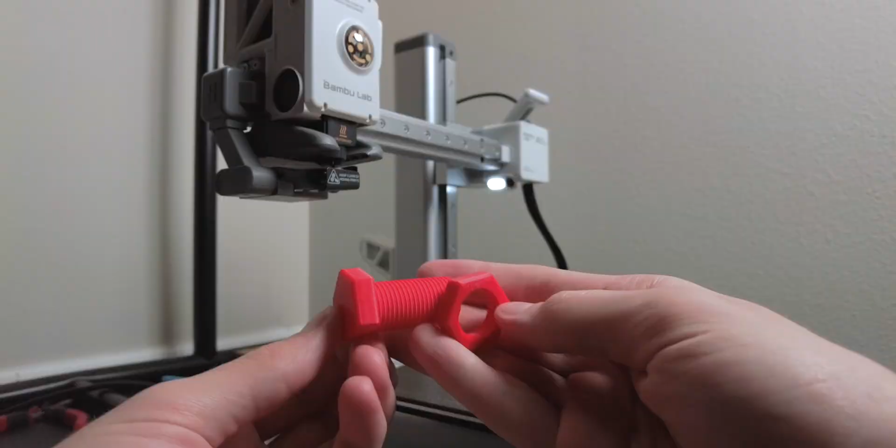Usually, threads are 3D printed vertically because it's an easy orientation to print, and while this may be okay in some cases, it doesn't give us the best strength because the layer adhesion strength becomes the bottleneck. It's very easy to pull the layers apart in comparison to stretching the layers apart. Igor from My Tech Fun made an entire video about 3D printing threads for the maximum strength, and this video is going to demonstrate how to design a bolt with this in mind.

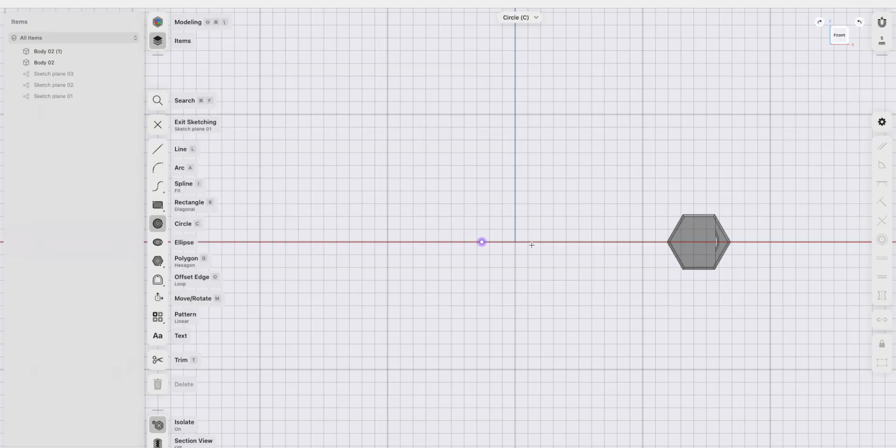I'll demonstrate this in Shapr3D. The first thing that I do is create a circle sketch with the center of the circle being on axis. I give the end of the bolt a slight bevel, then I jump to the perpendicular plane to design the thread portion. I sketch out a square shape to create a 45-degree thread angle. Then I rotate the sketch by 45 degrees and arrange the square so that the diagonal cross section is beyond the boundary of the cylinder that I've created.

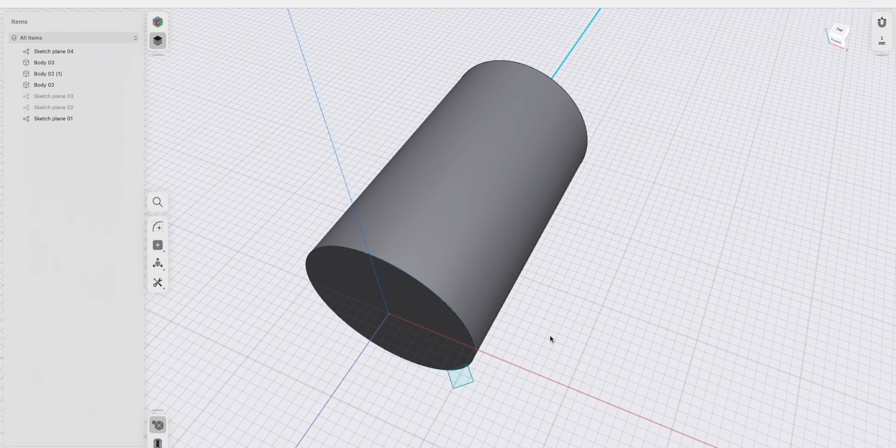I then move this square sketch down so that way the soon-to-be threads will cover the entire length of the cylinder. Then I select the square sketch and the axis the cylinder is centered on. I select the revolve tool, which creates a thread-like shape that I can extend beyond the length of the cylinder. Then I can adjust the pitch, which is usually a higher number, and normally I start with 9,000. Then I select the cylinder and the threads and use the subtract tool to create the threaded bolt shape.

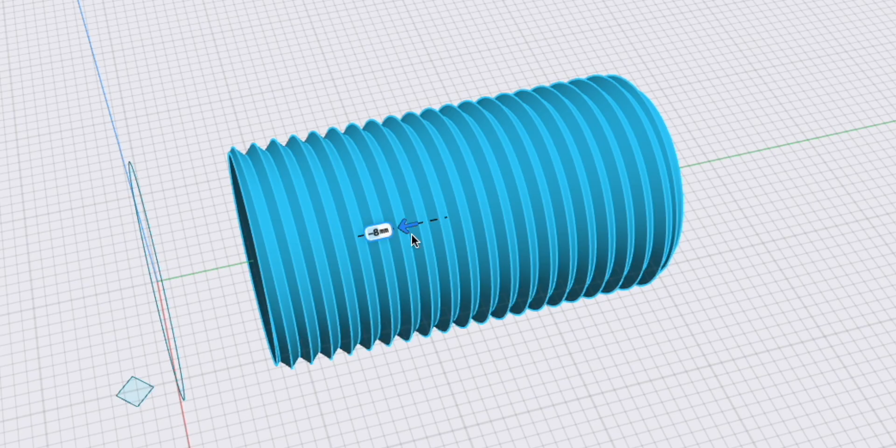I can then give this bolt a little shimmy to the left and create the hex head portion. The circle sketch is still chilling where I left it, so I can use the polygon tool to create a hex head shape and overlap the circle sketch. I then select the circle and hex shape and extrude it to create the hex head portion of the bolt, and I change the defined parameter from subtract to union. For added touch, I'll give the head of the bolt a little bevel.

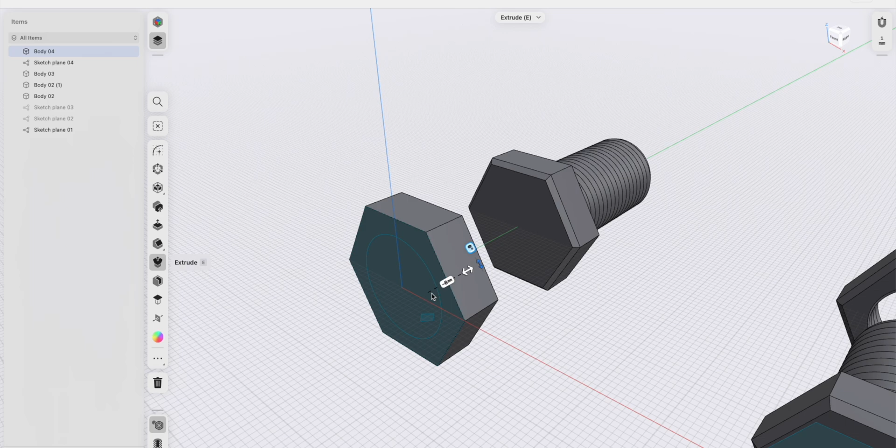I then move this bolt directly down the same axis so I can create the nut. I then move the nut down axis and create a duplicate of the bolt. For added touch, I'll give the head of the nut a little bevel. Next, I'll select the second bolt, and using the scale tool, I'll increase the height and width by 6%. Now keep in mind, how much 6% actually is depends on the size of the bolt that I'm working with, so as long as I do my math to figure out my tolerances, I should be good.

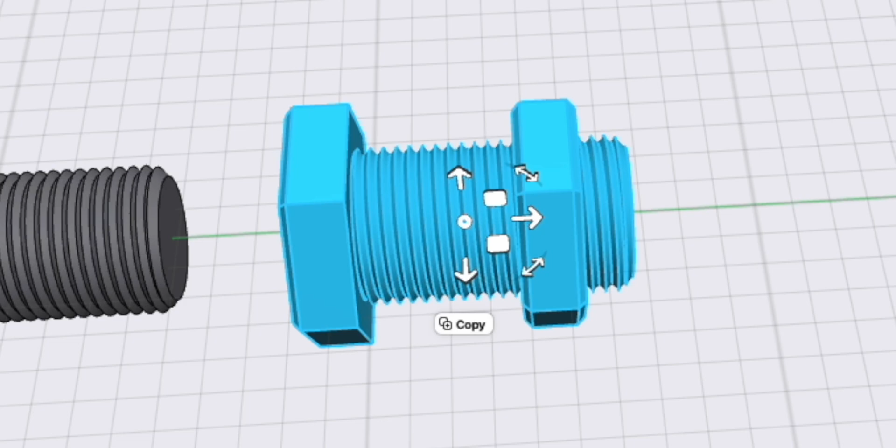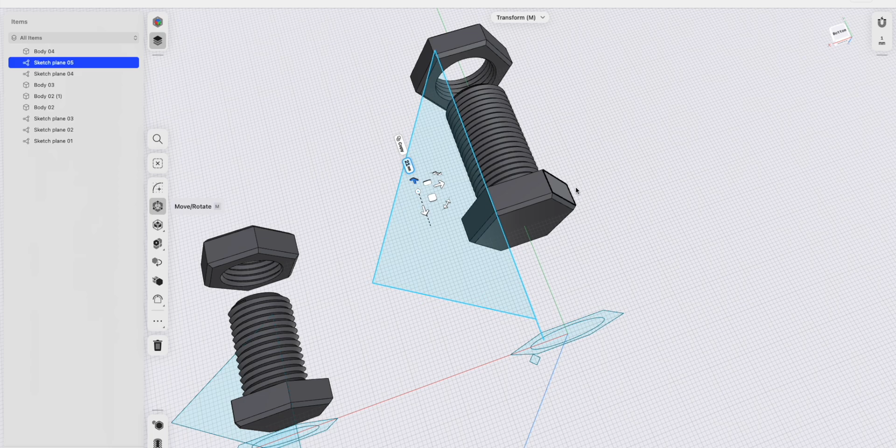Then I can move the nut over the threaded portion of the enlarged bolt and hit subtract. This is now what the cross section looks like. But now I need to split this bolt at the inside thread diameter so that way this can print horizontally and without supports. Using the innermost point of the square sketch that I used to design the threads, I can create another sketch that envelops the outside portion of the bolt and intersects the bolt at the inside thread diameter. I can then move this sketch to a higher plane and subtract this entire sketch from the bolt design to create the exact result that I'm looking for.

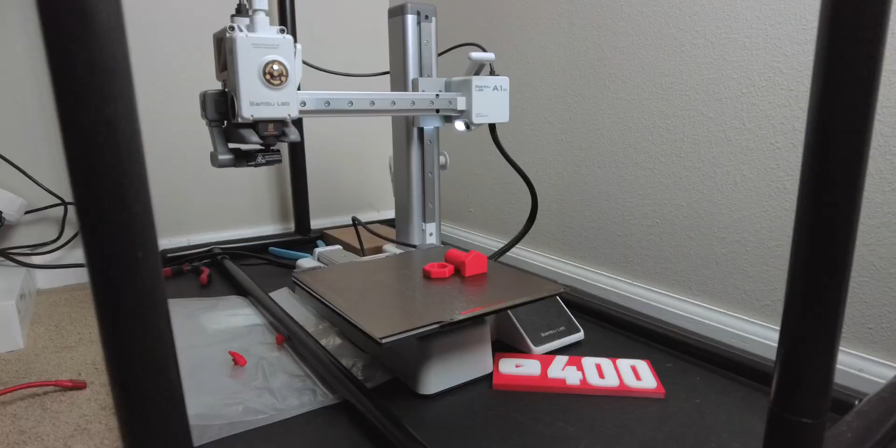Now I'm going to demonstrate how I slice this for 3D printing. In Bambu Studio, I'll split the objects apart and then I'll orient the nut and bolt so they're printing face down and horizontally. This gives the bolt the most strength it can have, and it allows us to use the least amount of material possible.